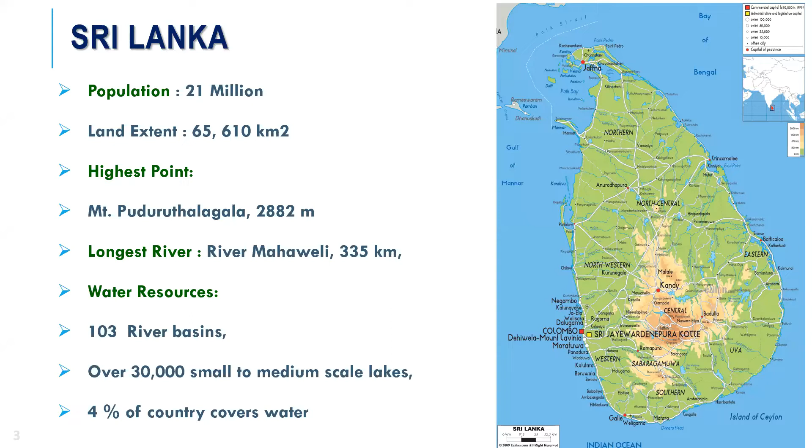Sri Lanka has 103 river basins and about 30,000 small to medium scale man-made tanks. When you take the whole country area, 4% of the country is covered by water bodies.

Sri Lanka is blessed with 2 monsoons and 2 intermonsoons, and the highest rainfall is about 5.3 meters, occurring in the middle part of the country. We basically divide the country into 2 zones: wet zone and dry zone.

Sri Lanka is covered with many lagoons, and Batticaloa and Puttalam are wonderful places with a lot of biodiversity, a very rich environment you can see over there.

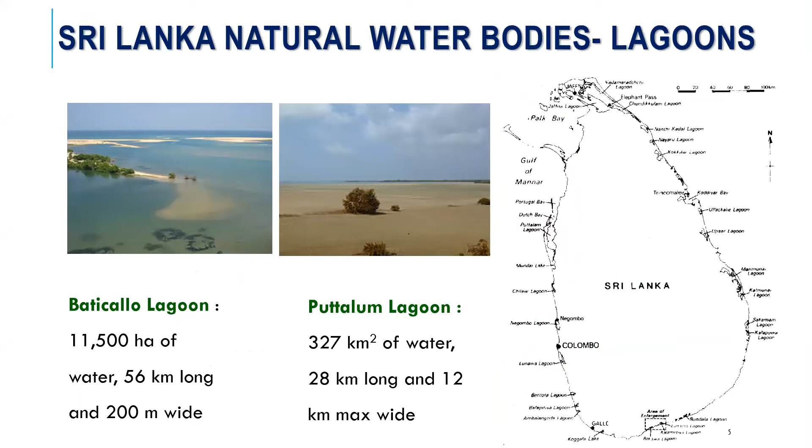The highest waterfall is 263 meters, the Bambarakanda in the central part of the country. Another very famous one among tourists is Dunhinda, where you can see a lot of water coming as mist. For power generation, we use almost 30% of total power generation from hydropower, and waterfalls are one of the sources for that.

We don't have that many natural reservoirs, but we have man-made reservoirs especially, and we have about 6 Ramsar identified wetlands, again related to the water environment.

So then the man-made reservoirs. Sri Lanka has a long history of man-made reservoirs, almost 2000 years, and recently we have several projects for dam construction. Almost all these reservoirs coming through history are placed in the dry zone, to address water scarcity.

The Mahaweli, the longest river, has 5 dams constructed, somewhere after the 1980s, to take up the major challenge of sharing water between the wet zone and dry zone. So this is the basic water management in Sri Lanka in a nutshell.

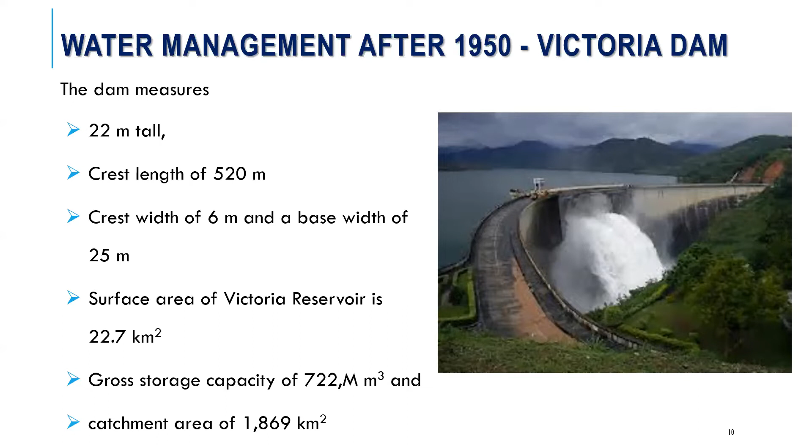To summarize, currently we have about 9,000 to 10,000 million cubic meters of storage capacity, but we are still losing almost 55,000 million cubic meters of water without any use. That's one of the biggest challenges Sri Lanka is facing right now.

So Sri Lanka is thinking in different directions. They want to go for trans-boundary water sharing between basins. They also have a lot of other ideas, different thoughts and views on increasing water storage capacity, or going for catchment management and so on.

In Sri Lanka, irrigation water is managed by the Irrigation Department, and the river Mahaweli has its own authority, the Mahaweli Authority. When it comes to drinking water, that is today's focus for us.

We have the National Water Supply and Drainage Board and the Department of National Community Water Supply. Both agencies are under the Ministry of Water Supply, under the Cabinet Minister. We also have local authorities who run some facilities around the country.

When it comes to the water board, the National Water Supply and Drainage Board, they have 334 water supply schemes, and right now we basically have conventional water treatment.

For the time being, we are moving towards the very first reverse osmosis desalination treatment facility in the northern province, so probably in future there could be more to come. This has a capacity of 24,000 cubic meters per day, funded by ADB, and is currently under the construction stage.

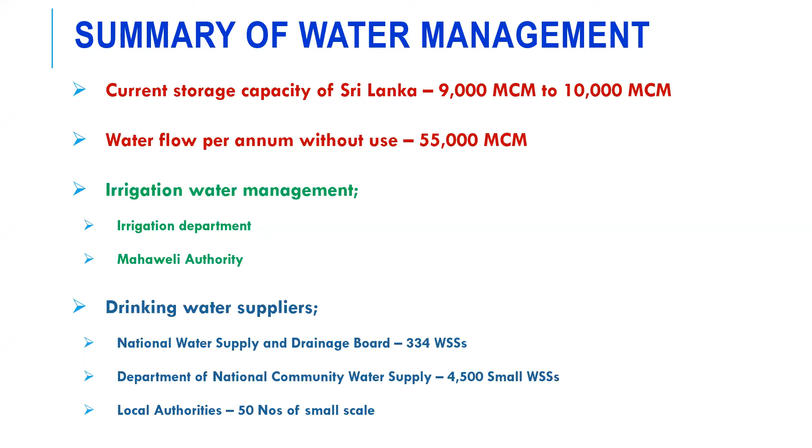As I said in the introduction, the current government has decided to move forward and bring the safe drinking water coverage through pipe-borne water and guaranteed water supply systems up to 100% of the total population by 2025. So this is the national policy.

Right now we get about 50% pipe-borne water, almost like 52%. Protected domestic wells are covering about 36%, and tube wells almost 3%.

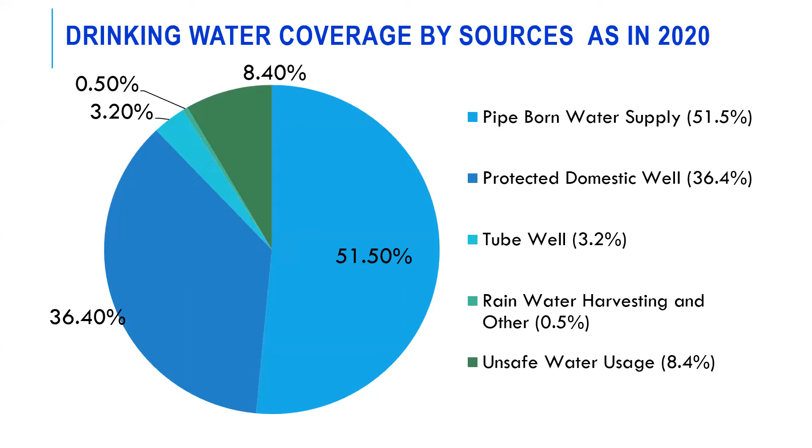For tube wells, where we go for the deep groundwater, we reach almost 100 to 120 meters, not like many other countries which go for about 500 to 1000 meters. We don't have the drilling capacity yet, but we are trying to improve that up to 200 meters in the near future.

So these are the targets in Sri Lanka. The National Water Supply and Drainage Board is trying to bring coverage from 50% to 75% of the total population by 2025. Then the Department of Community Water Supply, through community-based organizations and domestic systems like individual household facilities, will cover the balance 25%. So this is the idea for the whole coverage.

The number of families we are targeting to cover is given, with connections at almost 2.4 million households, and hopefully it will be 4.5 million by 2025.

The length of the pipe-borne water distribution network in Sri Lanka is about 44,000 kilometers, and probably another 30,000 plus kilometers will be added into the system by 2025.

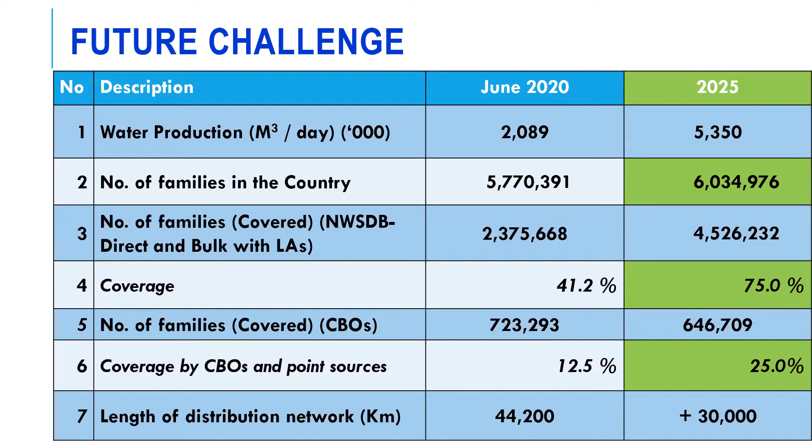So the Sri Lankan water sector has gotten very busy, because we have only 4 more years to go, and we are targeting 30,000 additional kilometers of pipeline within the country. That's a huge challenge for us as water professionals.

So the government is facing a lot of challenges to reach this target. It's not just finance or skills and technologies, but also water resources and more.

So the government has put forward ideas and plans to bring policy-level interventions across all directions, to release the pressure on water professionals. This is what the government is trying to do.

Finally, the main target is to bring up properly managed watersheds. That's the goal, because on one side you're causing pollution, and on the other side you're treating it - that's not sustainable. So if you can minimize pollution at the water source, that is the major plan.

Sri Lanka doesn't have very well-managed urban policies or urban planning, and that causes a lot of trouble when trying to manage water supply in the country. So that's something we have to keep in mind.

So I thought to bring up the water treatment concepts in Sri Lanka, showing a single treatment facility. This is more or less the same for the time being, other than the reverse osmosis plant which we are going to build for the very first time in the country - that's another 3 years before the plant is in operation.

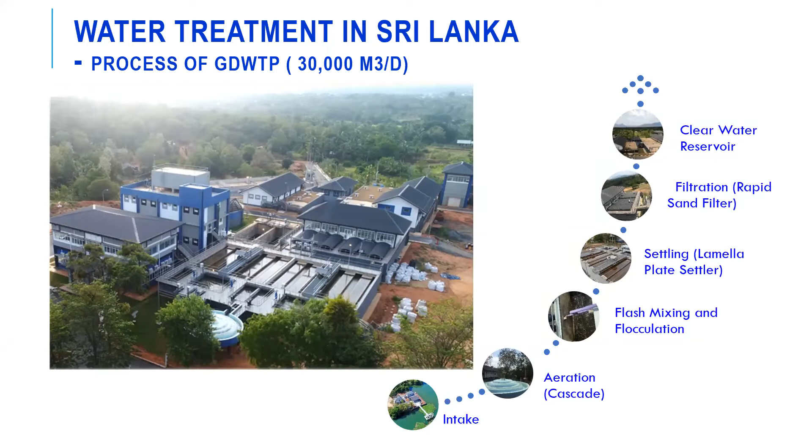Then the treated water is distributed through gravity and pumping systems. Nowadays we are also moving towards granular activated carbon filters, because we have a challenge of treating water with relatively high organic agrochemicals. So we are moving towards GAC, granular activated carbon, and in a couple of cases powdered activated carbon as well.

So this is the water treatment process available around the country, more or less the same throughout. So if someone asks whether all citizens in Sri Lanka have access to safe drinking water...

So somewhere in Sri Lanka the groundwater table is being raised up, so you can't maintain the minimum gap between the soakage pit and the groundwater table, especially in the wet zone during the rainy period. So that makes troubles for us.

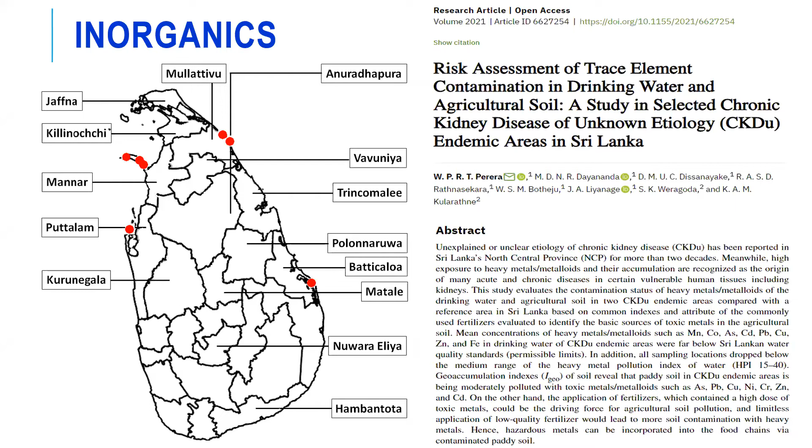This is the distribution of arsenic in the country, and luckily we don't find arsenic in the central part of the country, only in the coastal zone. The maximum recorded is 66 micrograms. The WHO limit is 10.

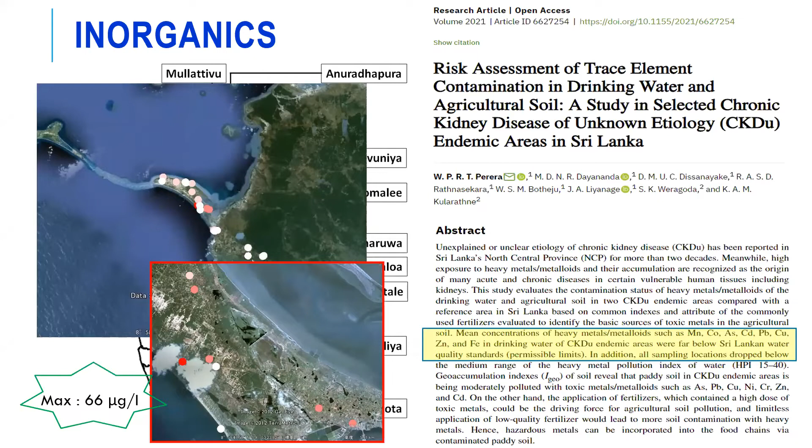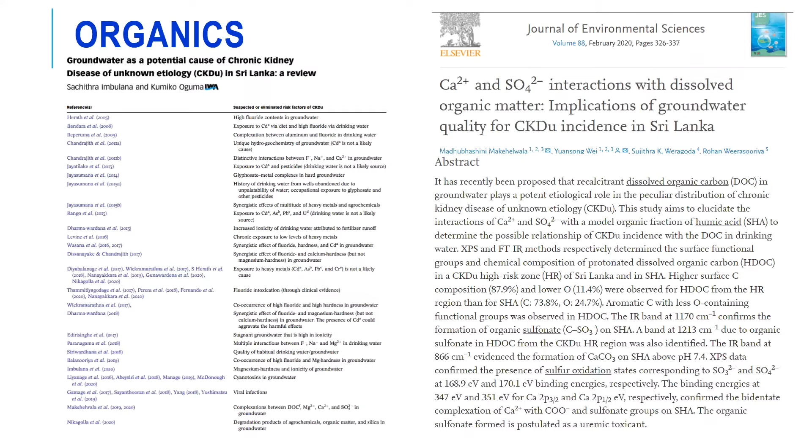When you take organic pollution, we know that organic pollution is not well understood so far, and even natural organics might pose some challenges. This is other research from JRDC about the combined complexation of organic and inorganic compounds, and how that can get through the human body and penetrate into the kidneys, focusing on this as a nationally interested project.

Then about trihalomethane—as I said, trihalomethane is one of the challenges that we find in the treated water, because we go through chlorination.

Chlorination all the way has a chance of reacting with natural organic matter, DOC, so then it may come up with THM that can cause cancer. So this is also an interest, and Sri Lanka is putting forward their thoughts and ideas, especially in water management and distribution systems. If you go for long retention rather than centralized chlorination, we think of going with decentralized chlorination, with booster chlorination. So this is one other thing we are trying here in Sri Lanka.

The country has taken a lot of initiatives to go with organic farming, but still it's a huge challenge. We find a couple of cases coming up, and these organic pollutants, agrochemicals, have been recognized as one of the crucial issues in groundwater pollution. So when you are addressing safe drinking water, you have to think of this and address this.

Then moving towards antibiotic resistant bacteria, Sri Lanka has had some research done about this, and we are moving forward to further studies, because WHO is putting up alarms telling that by 2050, 10 million people may die because of antibiotic resistant bacteria. So we have some collaborations with international partners as well.

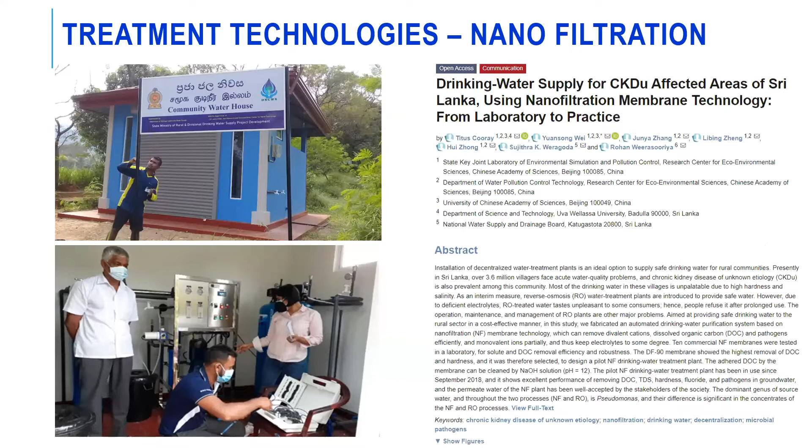In regards to addressing this groundwater pollution, we are trying our best to get the best technologies, and we work with China as well to see how we can improve groundwater treatment technologies available in the dry zone. So nanofiltration is being recognized and introduced recently, and it is well in place.

In addition, when you get the pipe-borne water, RO or nano might not be a feasible financial solution for us. So we are moving towards electrodialysis reversal technology, and we are right now trying to put up this EDR as a sort of new technology to treat groundwater in the dry zone.

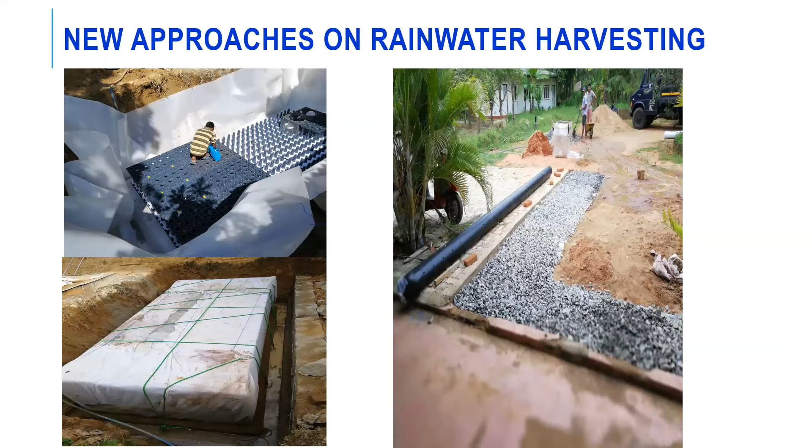On top of that, we are trying to introduce innovative rainwater harvesting techniques and sponge city concepts coming from Beijing, China, as another application we have just piloted here in the country to address rainwater harvesting, because Sri Lanka has relatively high rainfall throughout the year, even in the dry zone, about 1 to 1.5 meters. If you can manage this well, that would probably be a good solution for us to address climate change impacts.

Thank you very much, PUB, and thank you very much, NUS, and all the professionals, for bringing up this opportunity. We have got almost 80% of the water supply in the country covered with this 11-step approach, the water safety plan process. Keeping that as a note, thank you very much everyone.

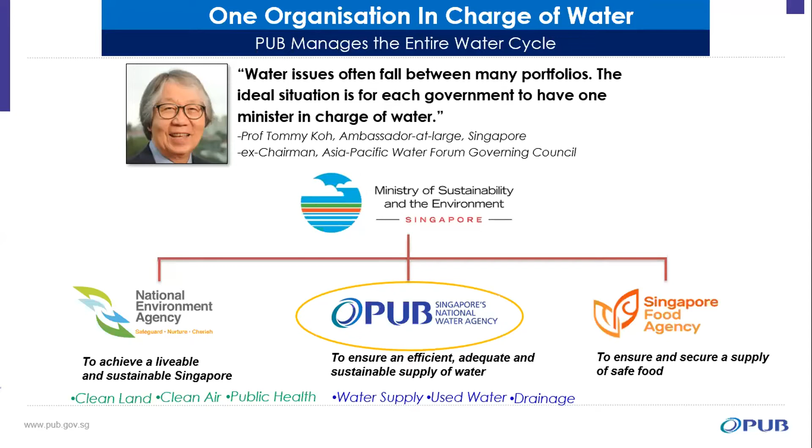PUB now has the capability to manage the entire water loop, as shown in this slide. PUB manages not only the water runoff from rain, it also collects, treats, and supplies it to the community. Then we collect back the water as used water, treat it, and in the normal hydrological cycle it goes back to the sea. This is what I consider the first drop of water. I always tell my audience that once PUB is formed, every drop of water that falls from the sky belongs to PUB.

But that is not enough, as I mentioned earlier, because we have limited land and limited storage. In the whole of Singapore's catchment, it's just like we have one glass of water - however I manage the catchment, I will only still have that one glass, probably 100 ml. If rainfall is 200 mils, I can still only collect 100 mil, and we have to let go of the other 100 mil. So we had to short-circuit the whole system as our solution, and this is to collect back the water.

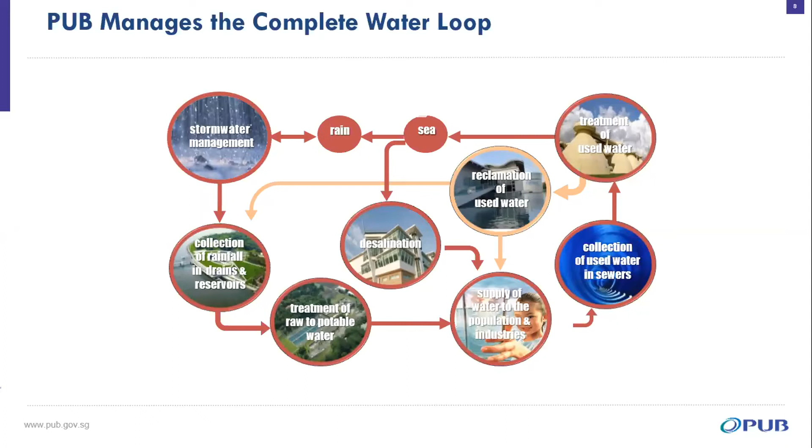With these three motions, we effectively close the entire water loop, allowing us to collect all fresh water and seawater and treat it into drinking water, further enhancing our water supply by recycling. Now PUB, being the agency in control of the entire water loop...

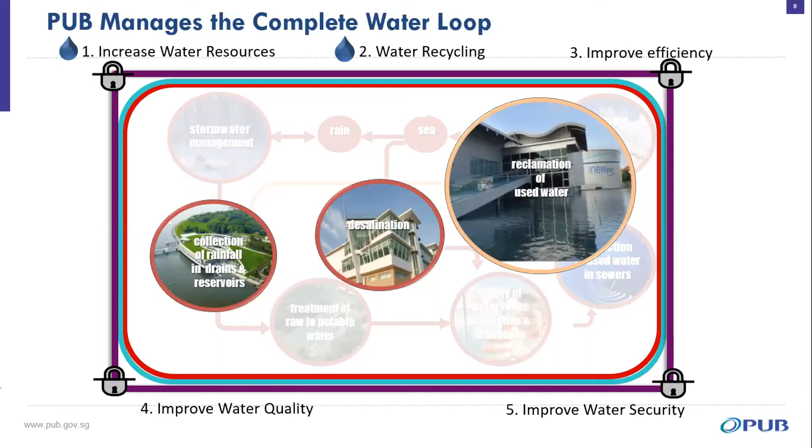All water matters are under the jurisdiction of PUB or the ministry. This allows us to improve the efficiency of our water system at the system level, and to control water quality from source to tap. This tightens our water security, ensuring all water is adequately treated, recycled, and used for drinking and industrial purposes. Effectively, we achieve our key strategy: we capture every drop, we reuse water endlessly, and we desalinate seawater. That is our main function in managing our water supply.

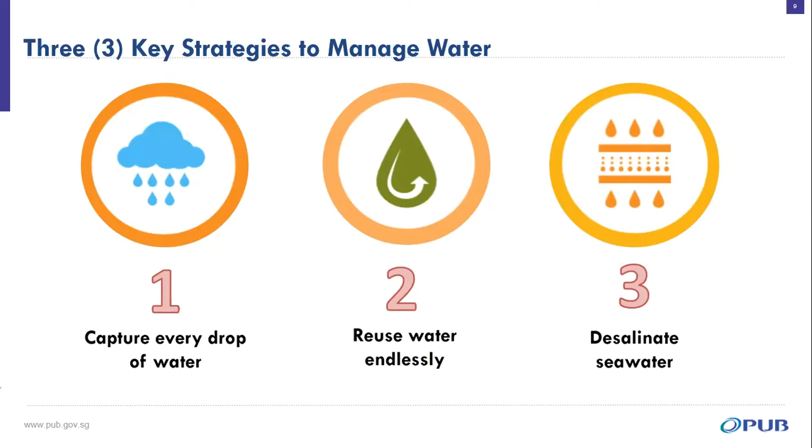By diversifying our sources of water, we created our 4 national taps, including imported water, water from catchment, NEWater, and desalinated water. I will talk about imported water later. Let me go first to the first national tap.

This is our local catchment, and we have 5 treatment plants that treat water from the local catchment for drinking purposes. That's our first national tap.

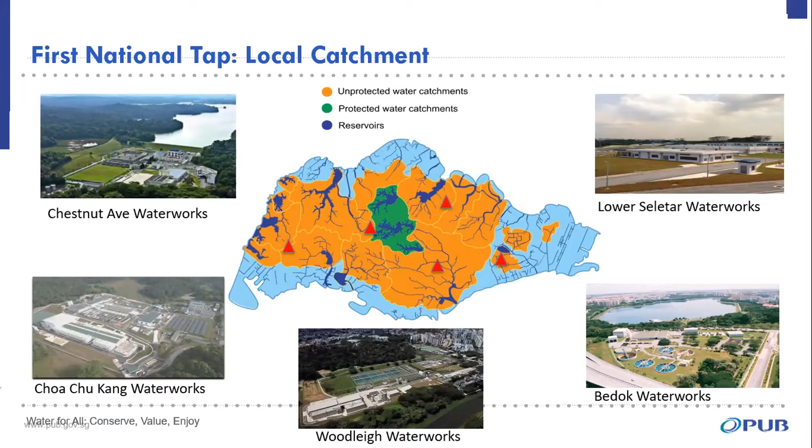The second tap is also surface runoff, but imported from our neighbor Malaysia in the north. We have an agreement with the Malaysian government to tap water and send it down to Singapore. This agreement will expire in 2061. Once that day comes, hopefully we'll be able to extend it. If not, our dependency on recycled water and seawater will go up, which I will talk about later. That is the second tap.

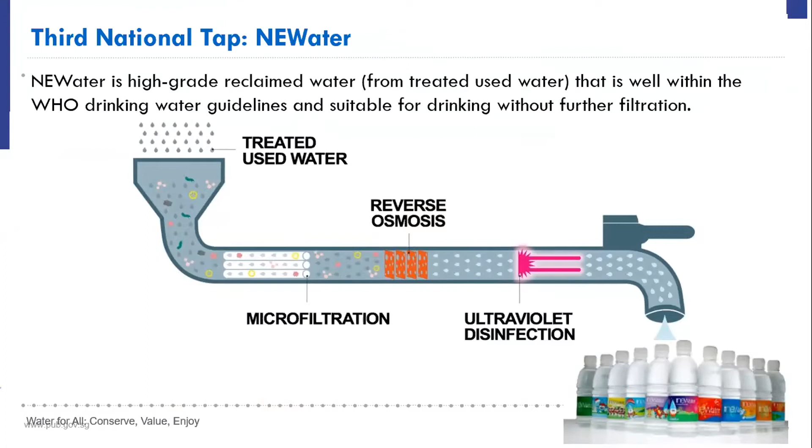The third tap, of course, is what we call NEWater, the recycled water treated with advanced processes to drinking water standard. And lastly, of course, our...

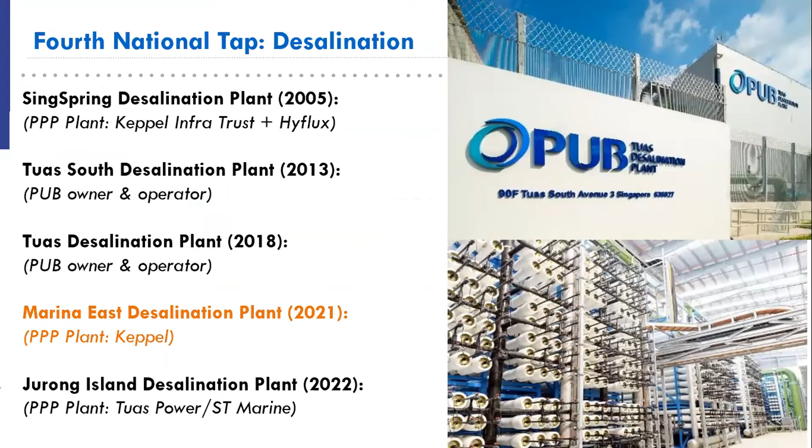...desalination. Currently we already have 4 plants in operation, and the 5th desalination plant will come online this year, in 2022. This is our latest desalination plant that has started operation, called the Marina East Desalination Plant. The design of this plant has some uniqueness to it.

It actually incorporates features that were demonstrated through our research and development effort. We call it the variable salinity plant. This particular desalination plant has 2 modes: one mode that can switch to treat surface water, and another mode that switches to seawater.

As I mentioned, we have plentiful rain, to the point where even after storing up to the maximum brim of our reservoirs, we have to let go excess rainwater. The idea of this dual-mode desalination plant is that during rainy season, excess rainwater will not be discharged into the sea, but pumped into a desalination plant like this one and treated as surface water.

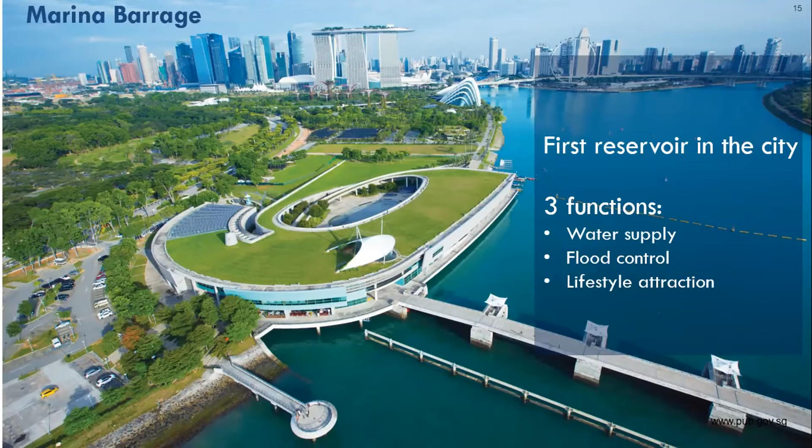In dry weather, as the reservoir drops and there's no more rain, this plant can switch to seawater desalination mode and take water from the sea to treat. In this way, we manage the cost of our production.

What I've said so far is really the hardware of our water management system. What I have not talked about is the software part, which I will not go into detail on. It centers on education, regulation, and engagement of our society to try to conserve water. These two functions, hardware and software, combine to form the whole principle of our ideology of water management for Singapore.

So that's enough on the water management part. Let me now touch on the water treatment part.

I put down water treatment, but I have also entered the word leveraging of technology. As I go through the slide, I will put a lot of emphasis on leveraging technology—how do we select technology that will best fit the conditions in which Singapore is applying those technologies?

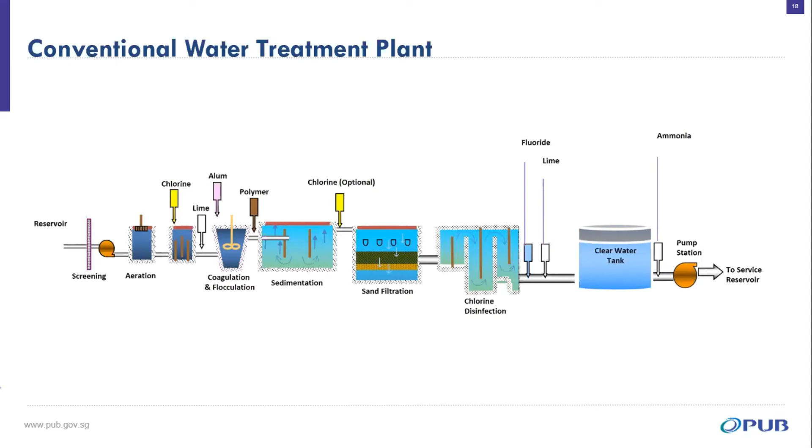As mentioned earlier, I think we started off with a conventional treatment plant that consists of coagulation and flocculation, sedimentation, sand filtration, and chlorine disinfection. This has been working well for us for many years now.

Climate change has a lot of impact on the way we now manage our water treatment plants. As climate change impacts grow, Singapore is seeing more frequent droughts and more frequent extreme rainfall. For example, we had droughts in 2019 where one of our ponds in the Botanic Gardens almost dried up, and most recently in August 2021, one of our major roads—Bukit Timah Road—saw heavy rainfall causing the canal to overflow and flood the road.

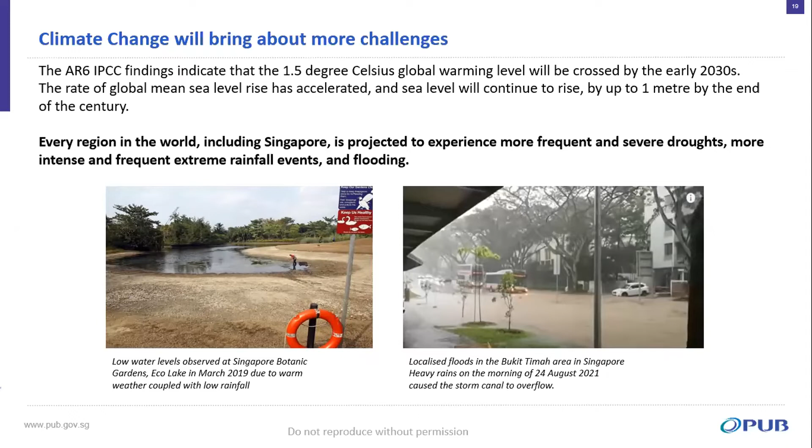These phenomena have impacts on water quality. In our reservoirs, we are seeing changes in the dominant species of algae, which actually produce taste and odor issues. We are also seeing changes in seawater, with many different red tides causing high turbidity and chlorophyll A changes.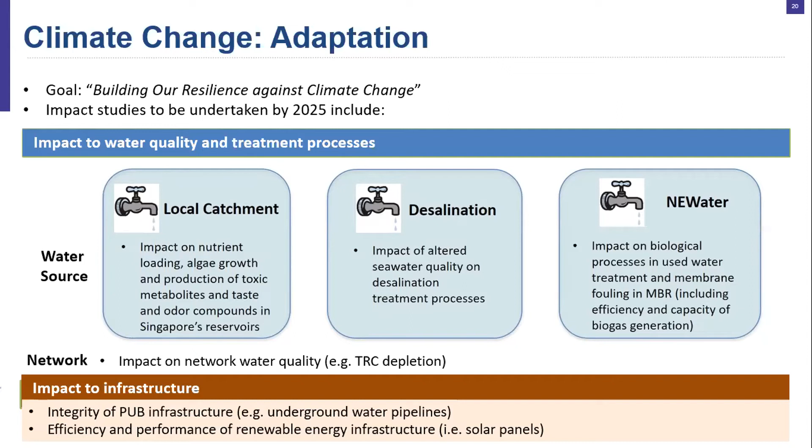Likewise, whatever happens here with the used water will eventually impact the NEWater or recycled water, whereby the fouling potential increases in our membranes. So this has to be taken into consideration as we see changes in our environment, and whether or not our current treatment plants can handle it.

As I said, in the whole water loop, the water treatment plant is the final barrier to protect the drinking water that is sent to the consumer. So it's very critical for us to understand the changes upstream of the water treatment plant, where we have instituted policy changes and incorporated technology to mitigate pollution in the catchment and try to maintain quality.

But this can only go so far—we can still see elevation, meaning the quality of our source water is creeping up day by day. Over the years, our TOC, the total organic carbons in reservoirs, has risen from a level of 2 to sometimes 9, sometimes even 10 or 12. This has created concern about whether the current existing treatment schematic at the conventional treatment stage is able to handle it.

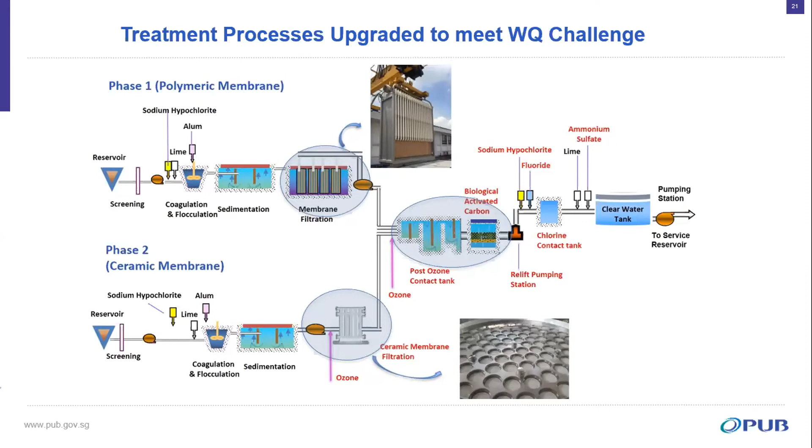This is one example of the retrofitting I mentioned. We have an existing plant using sand filters, and we have to remove the sand from the filter and convert it into a submerged membrane. In this way, we try to reduce the cost of introducing new technology by incorporating it into existing plants rather than building new ones.

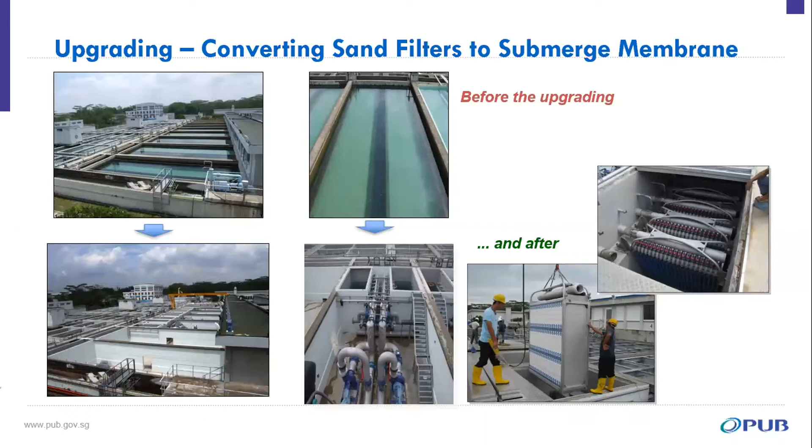Here is a greenfield site whereby we have the opportunity to deploy the most latest technology that can provide the optimum efficiency in a water treatment plant. Here I'm showing you the ceramic membrane that has been built at our CCK plant. It's a 40 mgd, or 182,000 cubic meters per day, plant.

This particular technology is selected not because it's straight from the market, but rather we spent about 10 years going through a research and development process of piloting and demonstration with our collaborators to validate the performance of the technology before we actually implement and build at large scale. This is the result of a 10-year research and development effort, and we decided to go full scale on this plant.

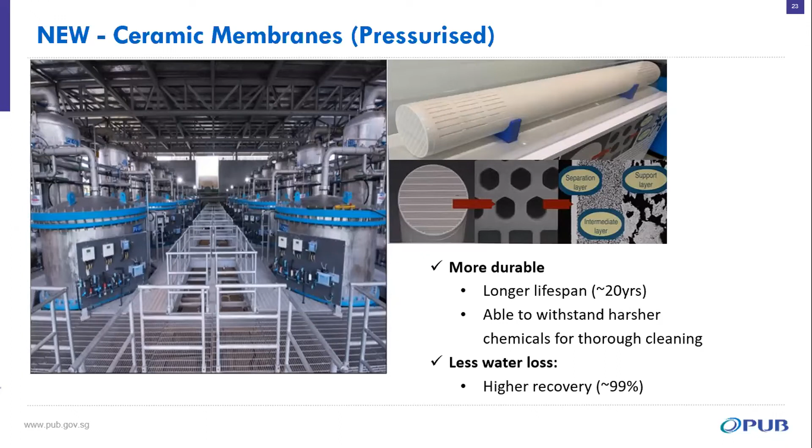The ceramic membrane is proven to be more robust, and it's actually able to deal with very aggressive water with high TOC. For example, even our polymeric membrane has a limitation on the DOC level. Once the organic passes a certain level, you actually foul the membrane. But in the case of ceramic membrane, it can withstand a high input of organics, and yet we can treat it without any problem. So this is the advantage of the ceramic. You can see the upgrading in the plants that incorporate all this technology.

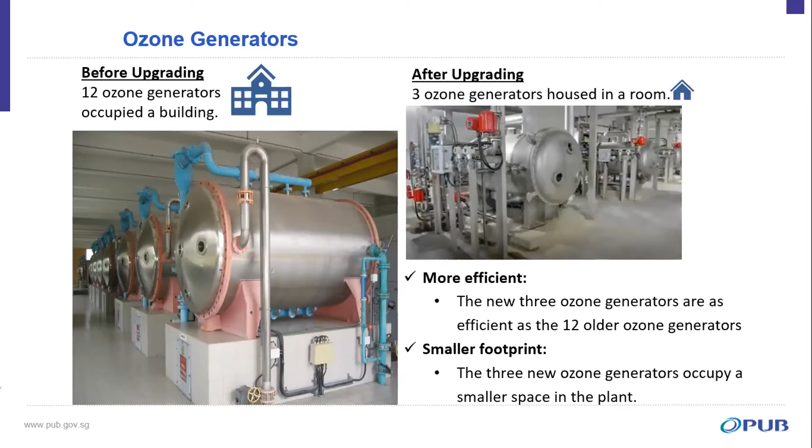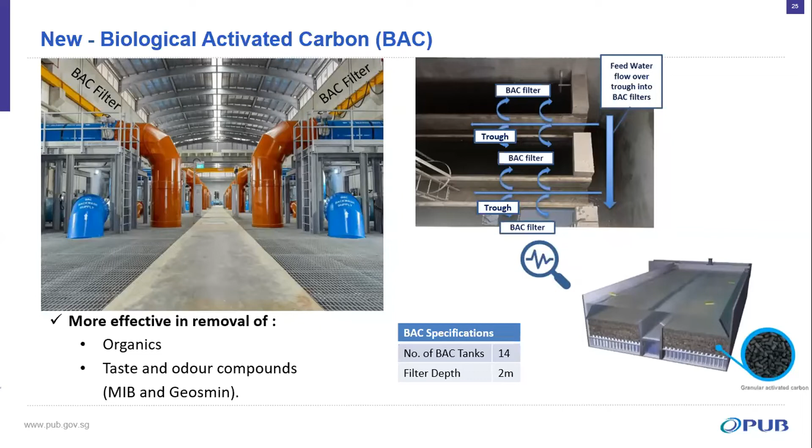This slide shows that we have also built BAC filters. As I said, this is an additional process added into our conventional treatment process, to provide the capacity or capability to mop up the organics that will cause regrowth in the system and render the water more stable in the network.

So, leveraging technology is an important effort in PUB. How do we do it? Looking ahead, Singapore's water demand currently is at 2 million cubic meters per day. We estimate that by 2060, demand will grow to 4 million cubic meters a day. As far as land storage is concerned, there's no more space for us to store, so we have to rely more on our recycling and desalination plants to provide that additional capacity.

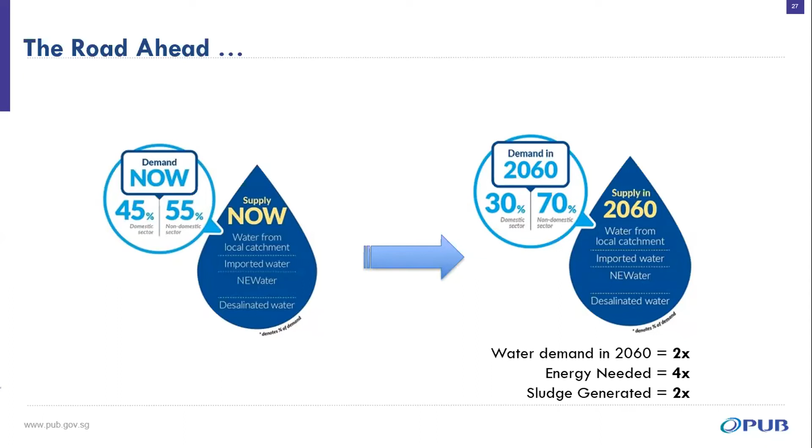At current cost of energy, doing that would be astronomically expensive. If we were to do nothing and continue our current practice of desalination and recycling, by 2060 water cost will be 10 times more, maybe more. So our long-term goal really is to look for technology that is able to provide us the capacity in 2060, but still at the cost of current energy and also at its current footprint. This is a challenge that we have to achieve by 2060.

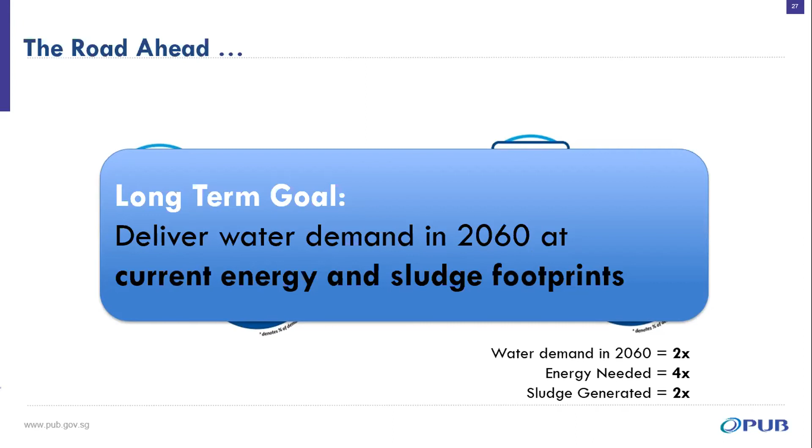So we have to come up with a plan, and that is to invest in R&D. As we move towards the future, it's not easy for us to go to the market, pick an off-the-shelf technology and say this is going to work, because different countries have different requirements. Manufacturers do not tailor-make a certain technology just for you. PUB realized that, and we need to drive certain technology that is going to fit our needs—I call it fit for purpose. That is where the government's effort has chipped in, through the National Research Foundation of Singapore, to push R&D investment under the water sector.

We started this way back in 2002, and up to today we have actually done 661 projects and spent $700 million of investment.

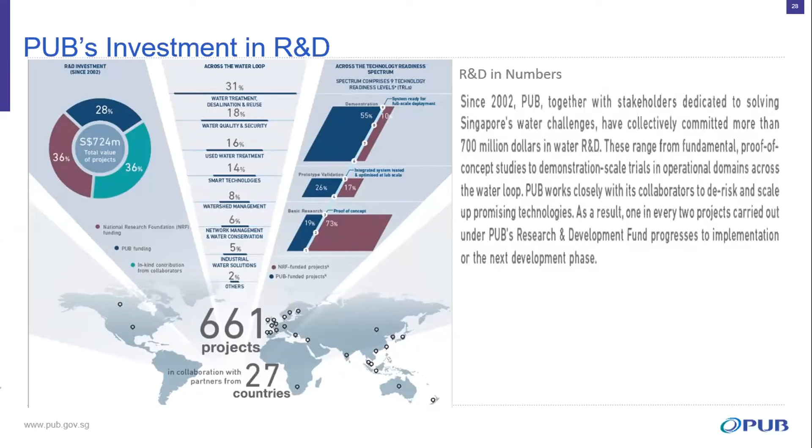These are, as I said earlier in terms of the BAC filters, ceramic membranes is part of the outcome. The variable salinity plant is also part of this effort. We have a roadmap that encompasses all categories of technology, including the drinking water segment, but it also includes coastal protections, water quality, management of our network, the used water network, and the drinking water network as well. So this roadmap forms the footprint for us to drive the technology that we require in the different paths.

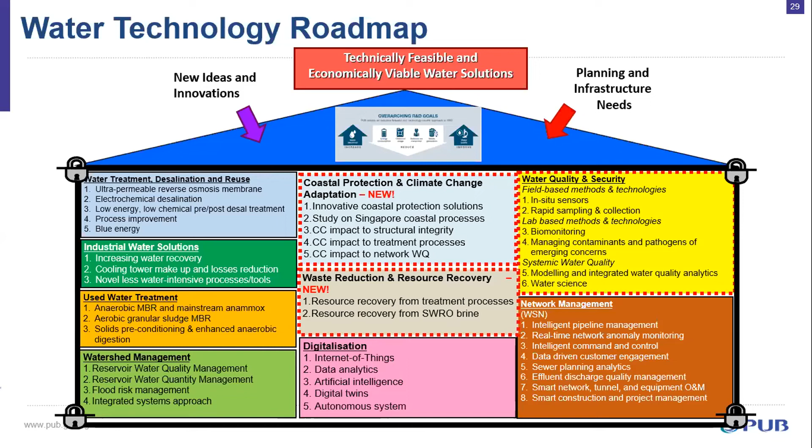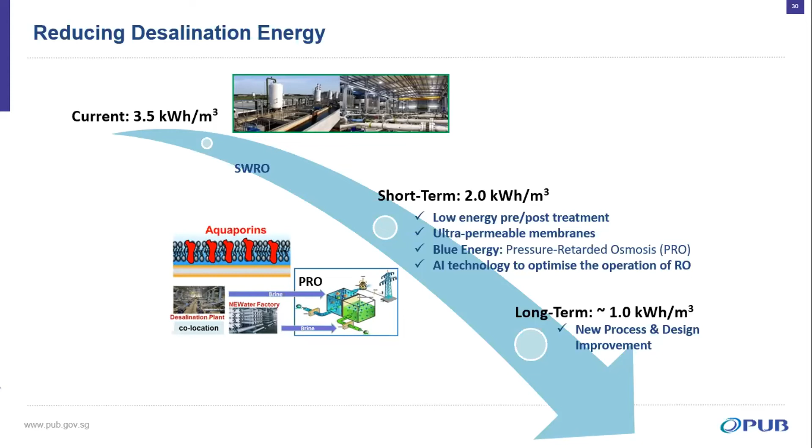We have to now drive in order to achieve the capacity in 2060 at the current price. We need to drive the energy cost of water from the current 3.5, actually now it's 2 kilowatts, eventually hoping near to 1 kilowatt. And likewise with recycling, we need to drive the energy down so that we could be at less than, hopefully, 0.1 kilowatts.

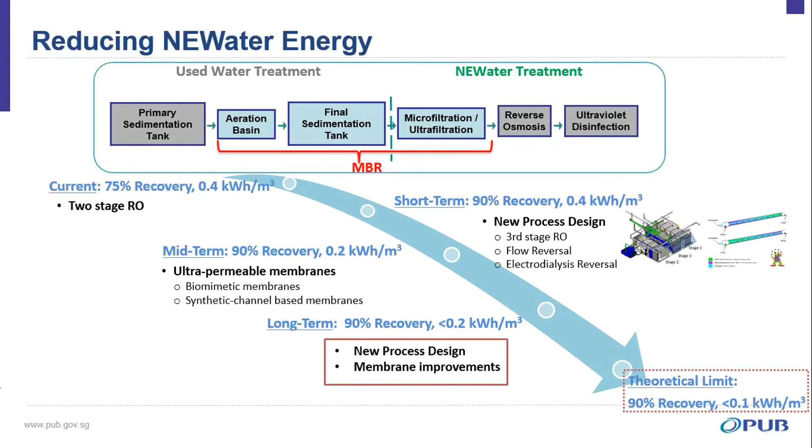We are doing projects that perhaps can combine, like you can see with MBR, we are combining 3 processes into 1 process. So these are the efforts that are currently ongoing.

Having done all this, when you introduce this at the system level with all the advanced technology that we employ, these are not easy processes that we can just manually handle. You come to a stage whereby every process, like the membranes, is fully automated. But if you put every process together, 10 processes in 1 basket, and each of them have their own automated system, at the system level they will not be able to run optimally. So we have to go into what I call a full automation control of the system at system level.

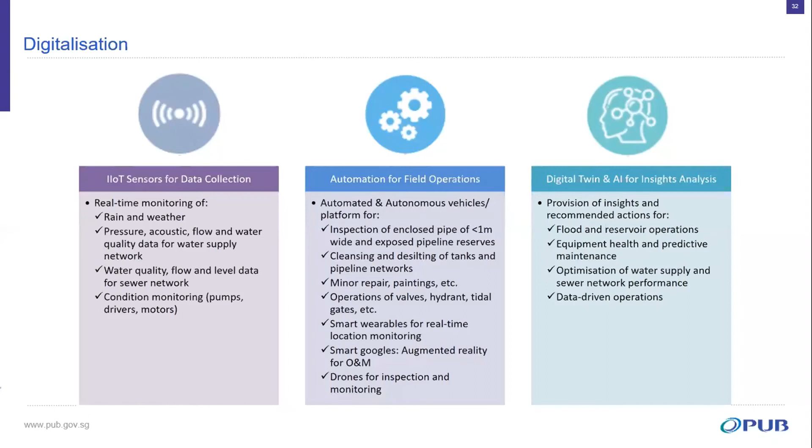Digitization is one way to have full control at the system level, to manage the process independently and as a single system. So a lot of research is going into digitalization as well. And that comes up with a roadmap that, like the water loop, we have what I call a Smart PUB roadmap.

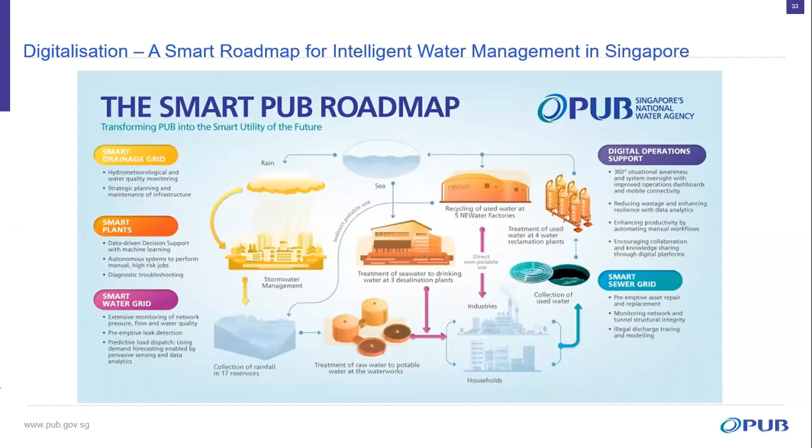So I'm going to give a few examples of the things that we are doing now. AOP piloting - currently we do not use AOP at the moment, but it is not something that we will not be using. We probably will be using it if the control in the water quality from the source continues to deteriorate, then there may be times that we will need to introduce additional processes such as AOP.

So instead of waiting until the time, we are actually planning ahead. We are doing research, demonstration and research work to actually come up with what I call a drawer plan, so that we can size up the dimension and also the specification of an AOP process, and work out the land size.

So in all our new plants, like our new recycling plant, spaces are allocated for AOP. In the event that in the future, 10 years, 15 years down the road, if this process is needed, we already designed to plug in such a process into the existing plant. So the existing plant will be designed to be coupled with the AOP when the time needs it.

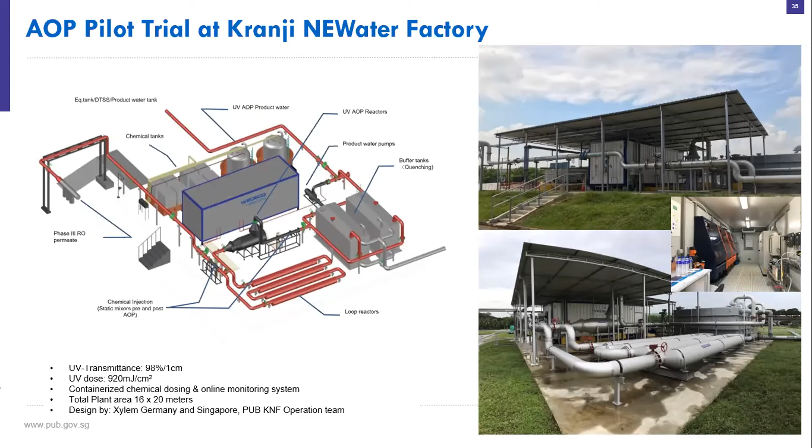We are also looking at different membranes, membranes that are able to do much more efficiently than the current membrane. Later on, probably the Professor will talk a little bit about the work that NUS is doing, working with PUB, so I won't go too much into this. We are also looking into membrane material and membrane construction.

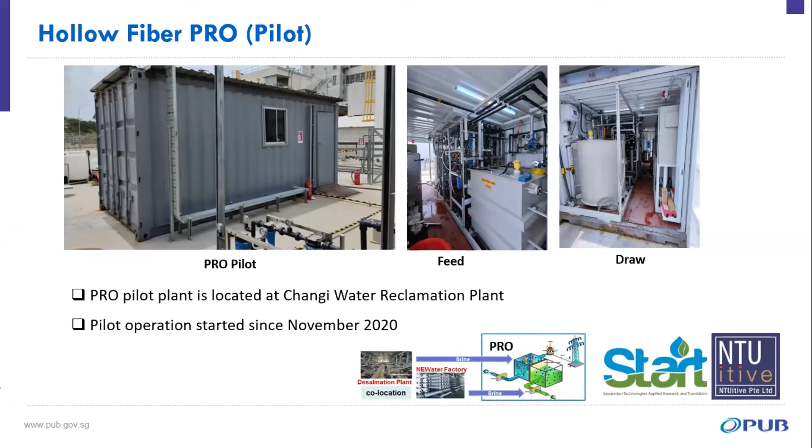Ceramic membrane has already been successfully tested in drinking water. So we are also looking into ceramic membrane application in desalination. As you see on the top of the schematic, I've drawn a coupling of two processes, DAF and ultra filtration. There is a possibility that if this is successful, we probably can do away with the two processes and just combine them into one process. Again, that will help save energy, as part of this process that we are driving to lower the energy.

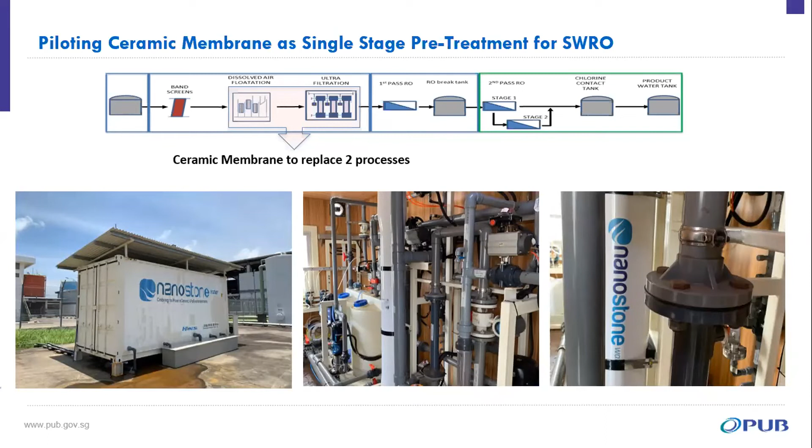Closed circuit reverse osmosis is another technology we are exploiting to help us improve our energy in the desal plant. We have been working on this particular technology for some time, and it has been coming up with quite promising results.

And the next step is that we'll be coupling this into what I call the IVP. It is a demonstration plant that will couple all the technologies we have tested into a single system, and then we'll validate the numbers from the piloting that we've gotten.

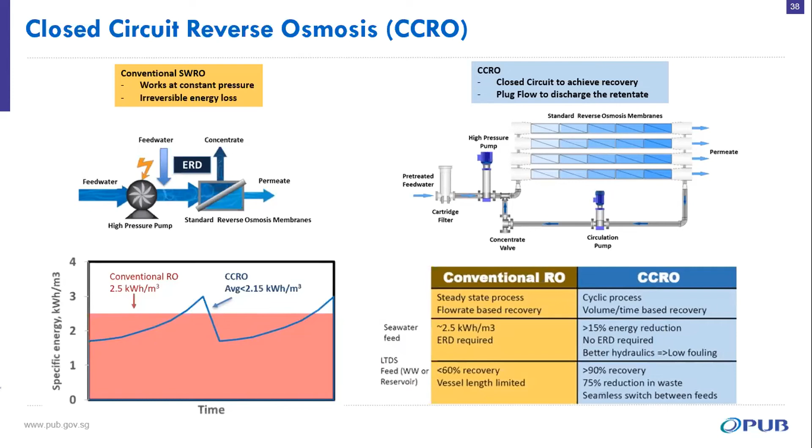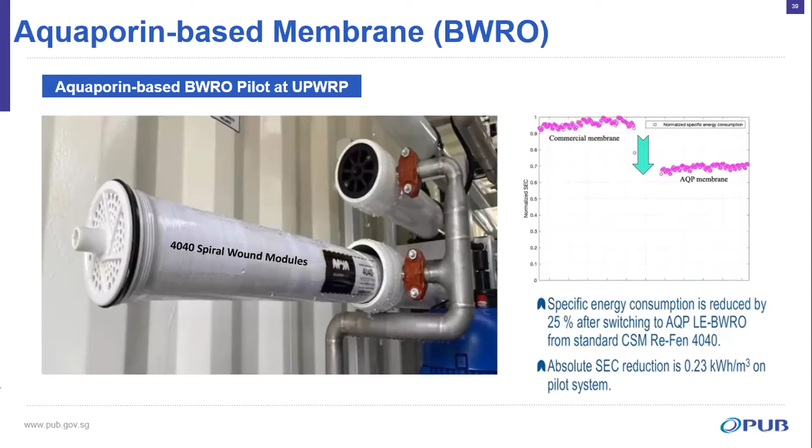Again, there's another membrane-based, aquaporin-based membrane that we are exploring. You can see on the graph the difference in energy use between the current commercial technology and the AQP from the aquaporin-based membrane.

So these are what I've said is our water treatment based technology. There are other technologies too, like I said, we have done 661 projects, and among those, some are listed here as well.

We've done projects like water quality monitoring, and on the used water side, we're even going into a GPS-less environment, flying a drone into deep water pipe tunnels to inspect the tunnel. So these are the various projects PUB is currently doing, and these are just a few I wanted to highlight to you.

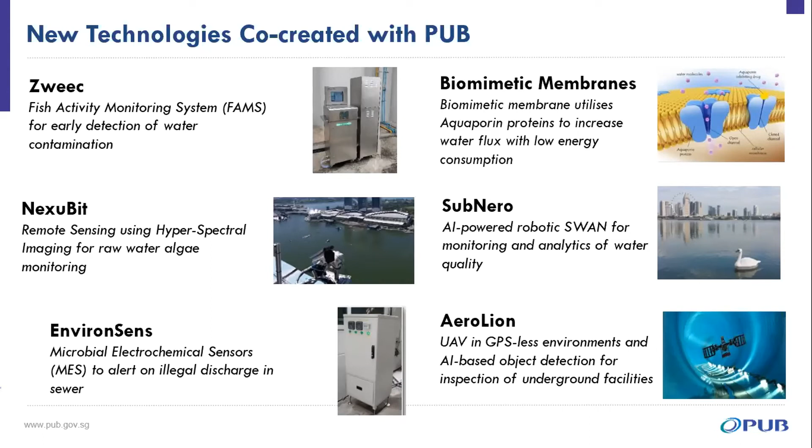I'd like to touch a little bit on the ecosystem. Singapore is a very small country, so as we push research work, maybe it's best if I do an analogy - let's take a car company, Toyota.

Toyota designs a car. When they want to produce this car, they are dependent on hundreds or thousands of small and medium-sized companies that produce all the parts for them to put together, and they need an integrator to put the parts together to form the actual car that can drive on the road. While the car is driving on the road, you need workshops, mechanical workshops, to help maintain it.

So a water treatment plant is like having a car. As we build up our water plant system, we need to have an ecosystem of industry that can support the plant, in terms of providing new technology, integrating the technology, and also supporting the operation of the plant.

This is an effort that works together - the Singapore government on a top-down basis, with the Economic Development Board, the NRF, the National Research Foundation, and PUB. We all work together to build an ecosystem that can support the water industry.

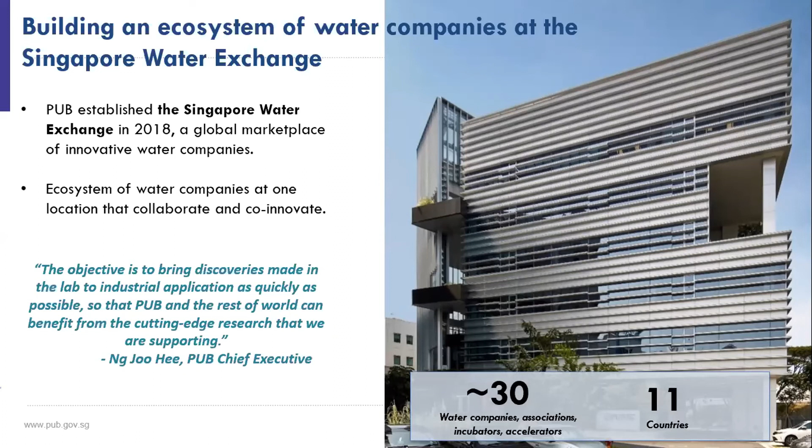an avenue for startups to set up companies, and also a training center to train our staff. Our Singapore Water Management Water Academy actually conducts courses for our own PUB staff as well as the industry. The next course coming up is water reuse, and I know Ian Law, one of our partners from Australia who is very experienced in water reuse, will be teaching this one.

So from 11 to 14 April - this is another effort in terms of the overall management system we're trying to build, to incorporate the training part as well.

Lastly, before I end, how do we interact? The Singapore International Water Week is one avenue whereby we're able to bring everybody together, and through this interconnection, it will help foster the overall wellness and health of the ecosystem we're trying to build. This is my last slide, and the International Water Week is happening in April - we're trying to do it as a physical meeting, and hope all of you will be able to attend.